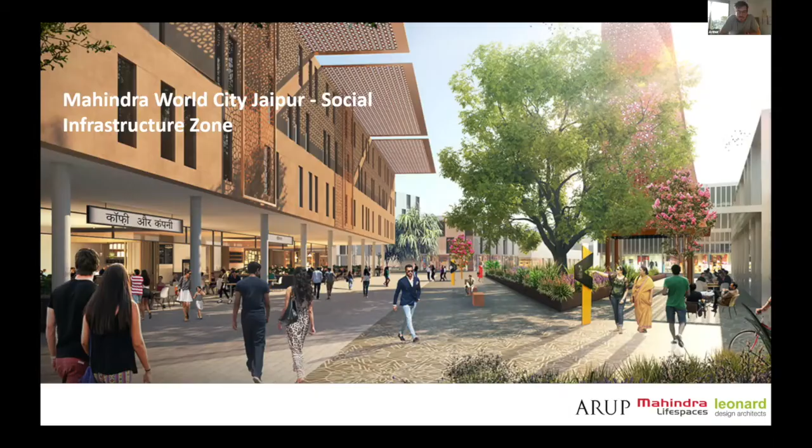Thanks, Christine. We're going to talk today about Mahindra World City Jaipur and our master plan for the social infrastructure zone in that project. The Mahindra World City project is a series of jobs-led cities across India, which look from Mahindra's perspective to develop a new kind of model for dealing with the challenges of urbanization across India, and look to raise the level of the working community and how they live in relation to where they work.

Our project brief site is just to the southwest of Jaipur, and our question really from the client was how to bring a residential environment in at 180 hectares to complement a very large employment-led site already established and being built out over time.

The Mahindra World City project is the first project in Asia to receive the Stage 2 certification from C40, the Climate Leadership Group, and those principles really helped drive the project throughout. One thing we were all too soon to learn from our site visits was the extreme weather conditions that have characterized Jaipur - very hot and wet in monsoon, and very dry and very windy in the rest of the year. That's kind of driven our project throughout.

So we'll cover off some of our responses to those particular conditions. But really, the overall intention was to create a sustainable development, a mix of housing, higher education, leisure, entertainment facilities that would complement the large employment function of the World City, but really seek to raise the bar and align itself with some of those C40 goals.

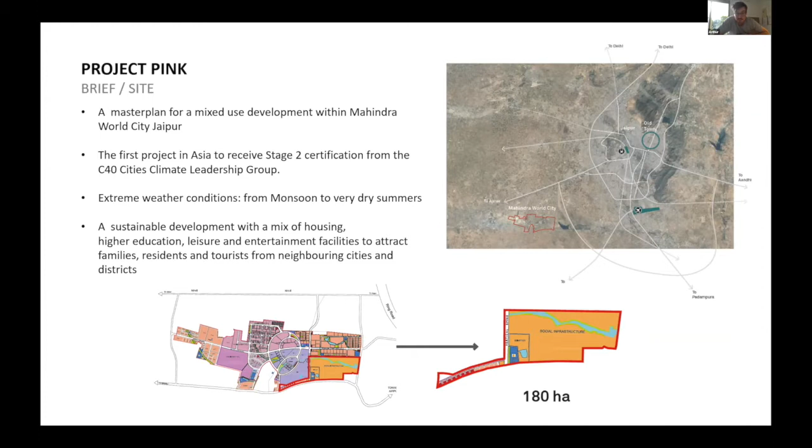Next slide, please. So we're going to talk about 3 key ideas today. The first is how we sought to develop a sense of community, both with the existing working community of the place already, and then imagining a future one. Thinking about landscape and open spaces as the real hero in the project and how it holds that place together over time. And then lastly, how our design and the urban planning and the coding of the work was really driven by a climate response and a climate sensitive response.

So that sense of community, really important to the project, was that it wasn't just felt of as one place, but it was a collection of places. We thought of that as a set of 10 interconnected communities using various different devices to hold them together.

Really important to us in developing this was to start with people. We were given an important way in to start to talk with some of the existing workforce. There's about 20,000 jobs on that site already, and a lot of people there that we could begin to engage with, and those stories, their experiences, really helped to drive some of the expectations of what this new place should be like.

And then equally, we used techniques to imagine how the future of this city might be informed by some new people, some different people that might come as a virtue of the offer of that place.

Two real important devices for us, a key feature of how we evolved the plan away from just being a residential place into a place of much more mixed and diverse opportunities. One of those opportunities was some relationships with existing universities that were looking to expand.

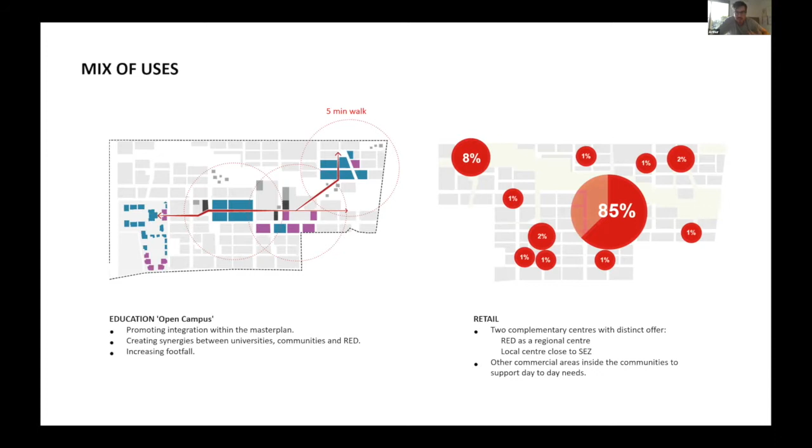And then holding that together is a real principle that you should be able to get from inside your community to the things that you need in a short space of time. So we really pushed hard at the 5-minute walk, a diversity of homes, diversity of open spaces, and connectivity of uses around that kind of really small, walkable and shaded space.

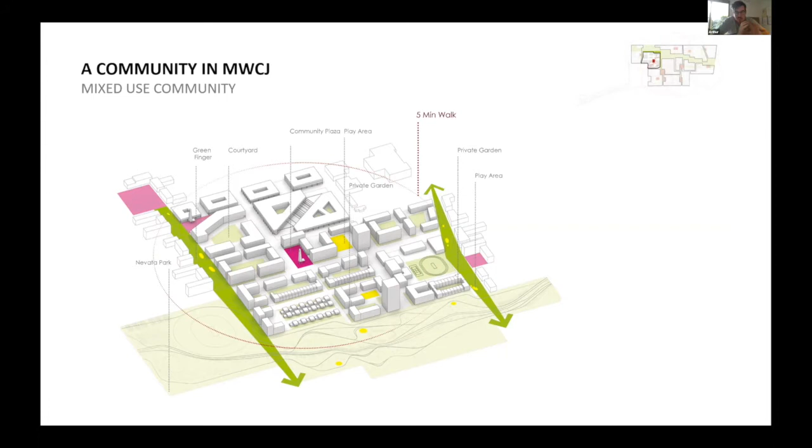So I'm going to hand to Jaime, who's going to talk about some of the landscape devices that held that together. Thank you, Arthur. Thank you.

I would like to start talking about how important the open space and public realm is as an intrinsic part of daily life, culture, and urban tradition in Jaipur. This is evident in the historic center, which is defined by the interface between water, topography, and vistas, and the mosaic of parks, gardens, avenues, and courtyards.

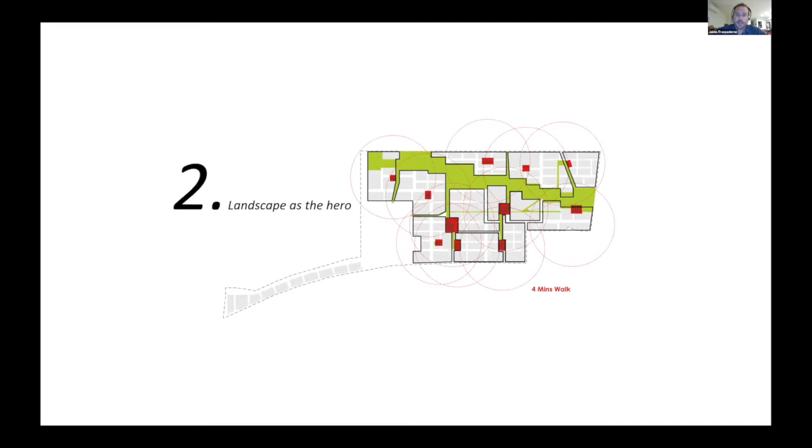In response to this, we developed the concept of communities in landscape, supported by the following core principles. The first is that each resident or visitor will be less than 4 minutes walking distance from a high quality landscape or open space. Each community will have a plaza, integrated local and convenient stores, and amenities to support active community life. Finally, active routes will promote walkability and cycling among the communities to ensure that although they have distinct personalities, they are coherent as a whole.

In order to achieve this vision of communities in landscape, the team developed a landscape strategy based on a network of open spaces. This network is defined by a series of typologies, and each typology plays a different role and function in the network.

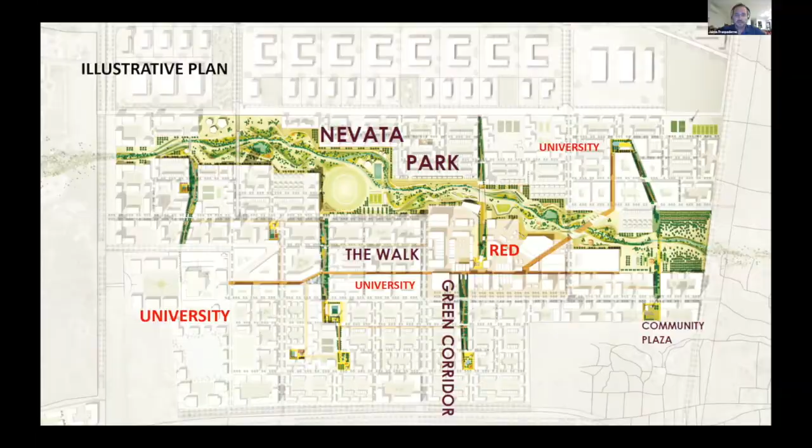The Nevata Park will provide the key destination open space, including a range of formal and informal activities, water attenuation, and connections with the wider development.

The green corridors will provide north-south shaded pedestrian and cycling routes, linking the scheme into the wider area and incorporating small gardens, places to dwell, play, and rest. These corridors also function as a natural storm drainage system, collecting and slowing the water before it reaches the Nevata River.

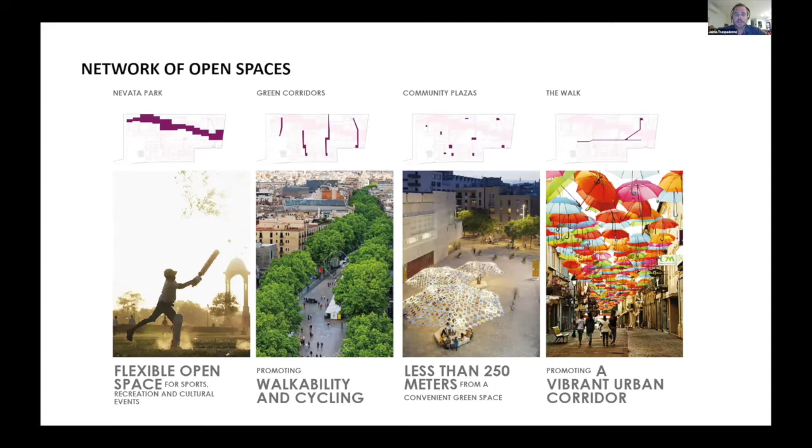Community plazas provide a range of activities, fostering community and a sense of place at the local level. And finally, the walk will provide a more urban and civic corridor that is flexible, seasonal, and shaded, connecting the Red District and the cultural and academic components of the scheme.

The Nevata is the name of the dry river that crossed the site. However, the river is not dry all the time. During the monsoon season, the river experiences several flood events.

We took that as an opportunity to use the park as the main structure for the framework for the master plan, and we use the park as well to collect the water. We use very clever topography to use spaces under the park to collect water that we are going to use to irrigate the open spaces during the dry seasons.

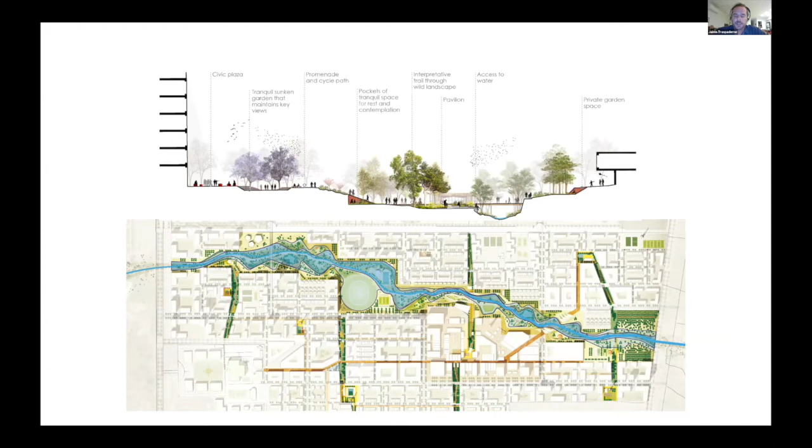And now Sogol is going to talk about our microclimate strategies. Thanks, Jaime. A climate responsive design was one of our core principles for the master plan, especially as Arthur mentioned, considering the extreme weather conditions in Jaipur.

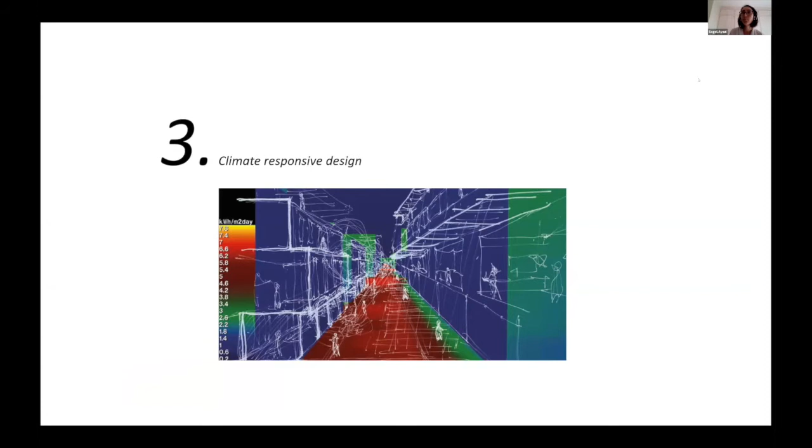The objectives of our strategy were to maximize thermal comfort, provide a comfortable walking and cycling environment, and also reduce energy uses. We developed a series of passive strategies from macro to micro, and the main principle here was to maximize solar shading and complement that with an effective natural ventilation strategy.

Using solar assessment tools, we determined the optimal orientation for plots and pedestrian routes to improve thermal performance of buildings, but also to ensure that the main links between places provide a comfortable environment for pedestrians.

Similarly, the cooling strategy at different scales aims to encourage cool easterly winds while preventing undesirable hot westerly winds.

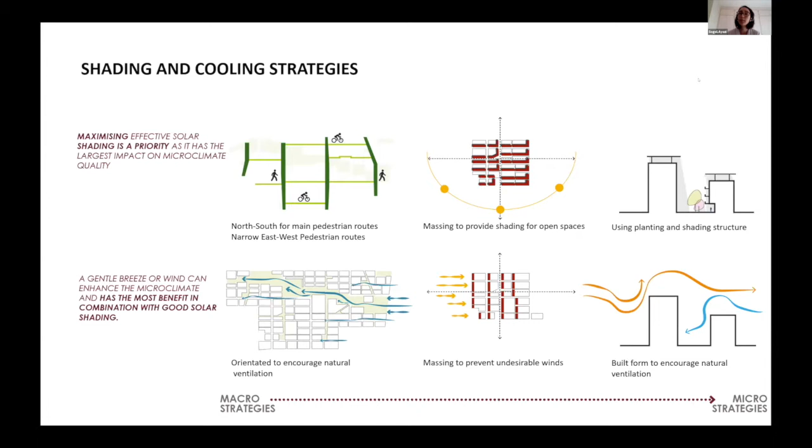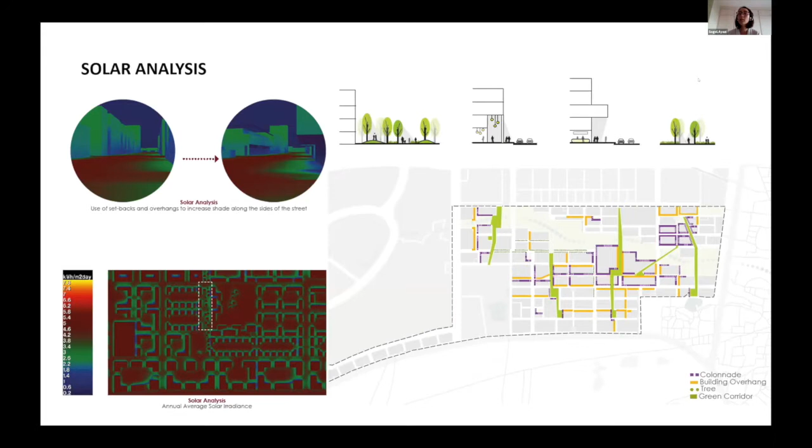The plan here shows an overlay of our passive strategies, and as a result, we propose a network of shaded and walkable routes between different places, and also a comfortable outdoor environment.

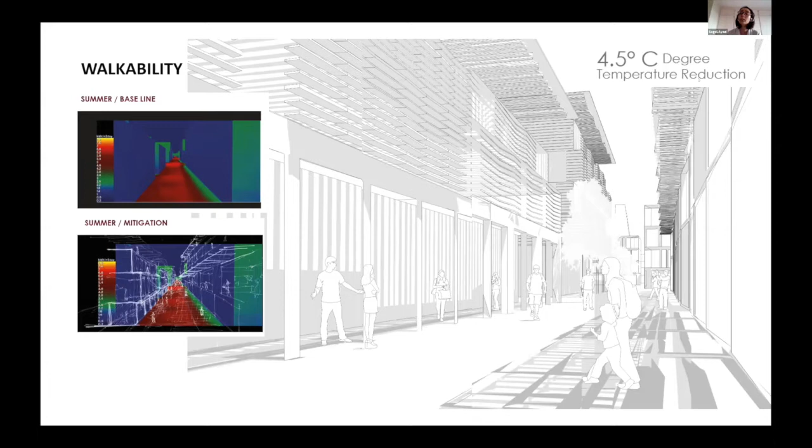And lastly, this is an example of how solar analysis has informed our design. As a result of the overlay of all of these passive strategies and a narrower street profile, the outdoor temperature within the main pedestrian routes decreased.

I'll hand into Arthur to conclude.

I think that's your time. I don't know how quickly you can conclude. Arthur, can you give us one final killer sentence? I can, I just wanted to recap.

So we got 10 new self-sufficient communities, about 9 kilometres of landscape frontage for those, 4 kilometres of shaded and walkable streets, and about 10,000 new homes altogether, 3 universities, about 8,000 additional jobs in that mixed-use place. And what we think, with our client, is now a scalable model for sustainable development in India, underpinned by C40, and now we're starting to see that play out in other cities across the country.

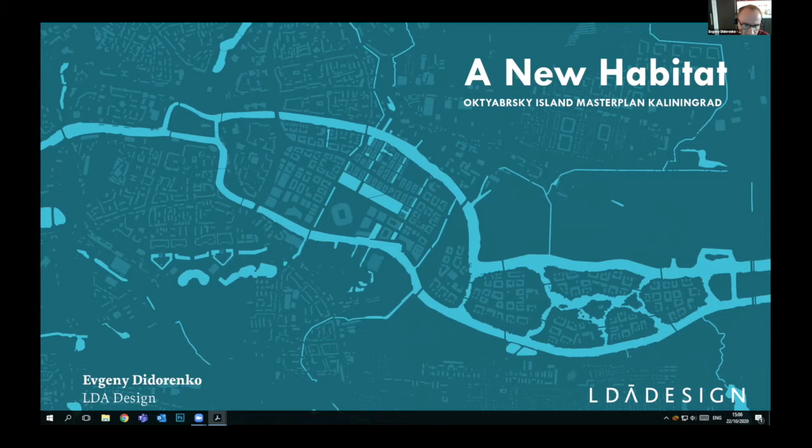So, judging by my name and my accent, you probably already realized that I am Russian. Surprise. And I specifically stretched this map to include my hometown, so it's far away in Siberia. So I'm originally a Siberian guy.

Back to the location of the site, Kaliningrad - you probably never heard of it, but it is an exclave of Russia located in Europe. It used to be part of Germany till the end of World War II, and now you can see that the site has clear potential to become the rising star in the constellation of the Baltic city ports.

So Königsberg is the original German name of Kaliningrad, and it was really badly damaged during World War II. After the war, the Soviet government decided not to rebuild the whole city following the old German building footprints, but instead to build a new socialist exemplar city on top of the old German city. So to this day, you can clearly see those layers: old German churches, Soviet brutalist architecture, and landmarks of the contemporary era, like the stadium built for World Cup 2018.

So a bit of context and a brief: the big changes for the city really started back in 2010, when the city joined the shortlist to be host for World Cup 2018. Shortly after that, construction of the stadium started, which became a catalyst for development for the whole island.

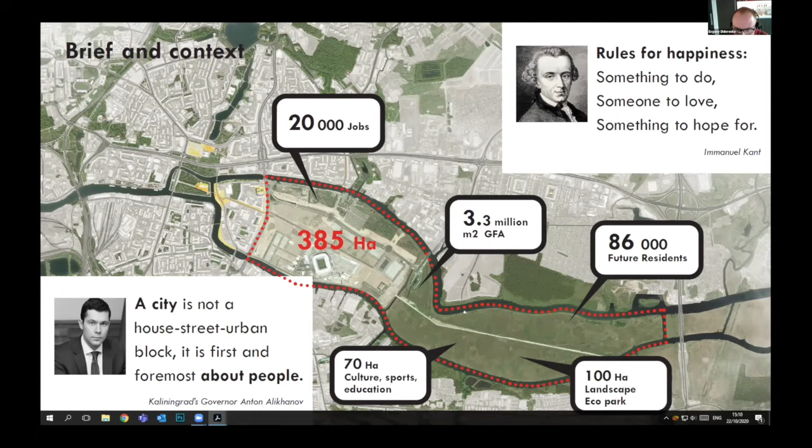So now, if we keep focused on the island and buckle our seatbelts, we'll time travel 80 years and get to the year 2100. So, voila, the master plan is delivered.

Now I will quickly go through the key design moves, or underlying design principles, that helped us shape the master plan which is delivered today.

So the main idea was to link the missing green connection and circle the green loop, which follows the old fortification belts of the city. The only missing link was here on Oktyabrsky Island. So we introduced a few linear parks and a big public open space around the stadium, which is already built on site.

The next big move is bringing water and big public spaces inside the site boundary, to increase the value of development overlooking these spaces, like a big central park in the western part of the site and a big ecology park in the eastern part of the site.

Next design move is a feasible phasing strategy with self-sufficient clusters. You can probably intuitively see those chunks of development — the whole master plan is divided into parcels or islands of development floating in a landscape. It was our intention that the master plan can be delivered in phases, and each phase has its own civic space or core with non-residential facilities like schools, kindergartens, commercial uses, and maybe even offices.

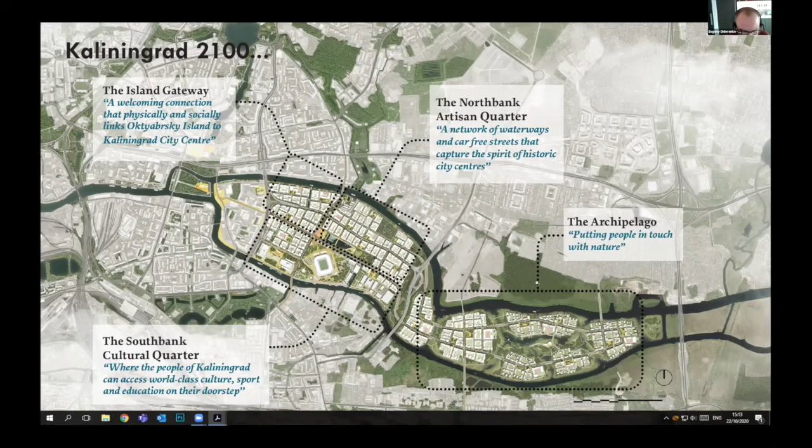The final, 4th character area is the Archipelago. Here we wanted to bring big public open space and water inside the site, increasing the envelope of overlooking public spaces to increase development value and put people properly in touch with nature. So now we'll quickly go through all four character areas.

The first is the Island Gateway, where we really needed to deal with existing infrastructure and make sure this scarred site was stitched back together. This heavy infrastructure, flyovers and things like that, were basically failures of the previous development strategy of the city. Instead of hiding them, we wanted to embrace them, bring life underneath, and make sure they're properly overlooked using public art and light installations—things like disco balls—or commercial uses and play spaces, to keep them safe and active.

Another way to get to the site is by water. Imagine arriving on site via water taxi—this relationship with water, and this edge condition between architecture and water, was crucial for the whole master plan.

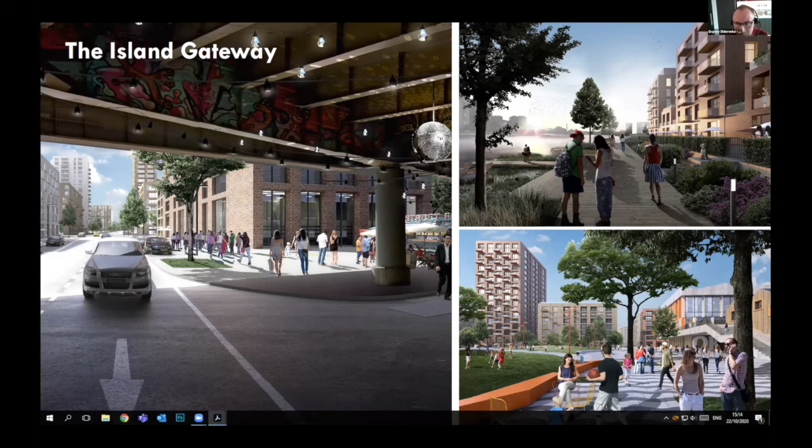The next character area is the North Bank Artisan Quarter. As I said before, we were inspired by old German Königsberg and its medieval structure. We wanted to achieve this vernacular feeling of authenticity, using brick but in a modern, contemporary interpretation.

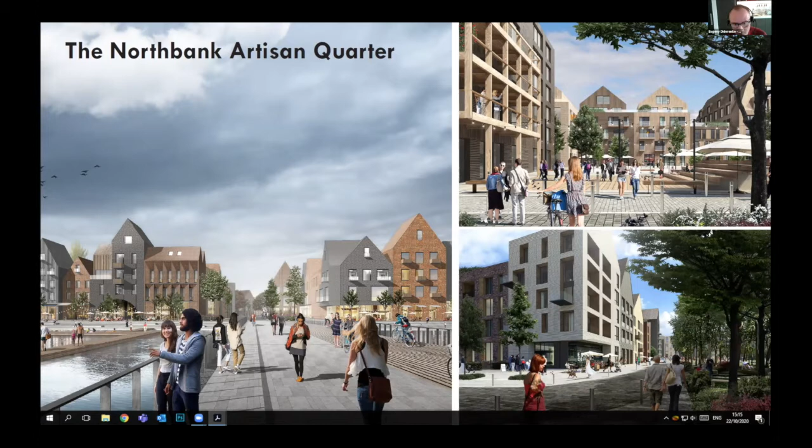The next one is the South Bank Cultural Quarter. Here we wanted it to become a constellation of world-class attractions, with the park campus itself becoming a health and well-being legacy for the whole city. The privacy boundaries of the stadium should be defined by landscape, not perimeter fences, as is usually done in Russia.

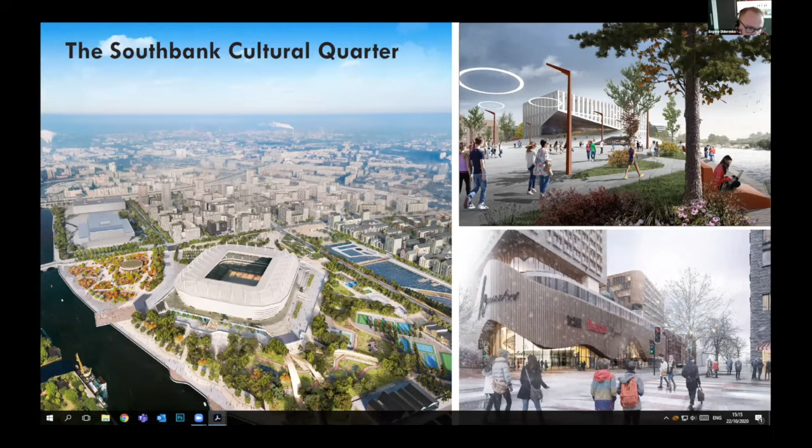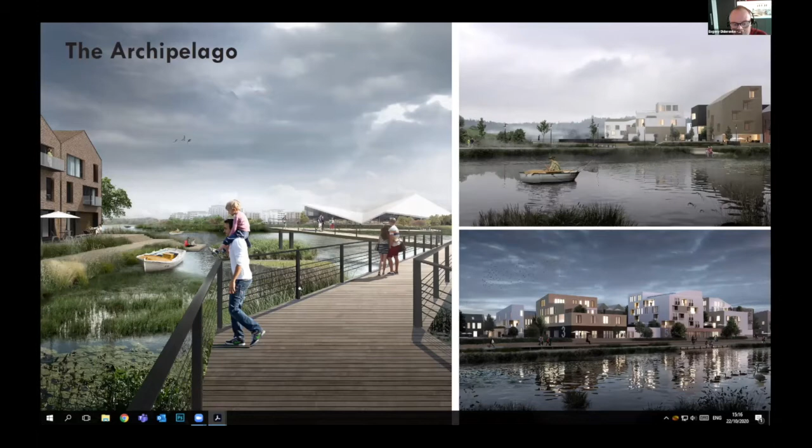So the last one is Archipelago. Here we wanted to bring a big nature ecology park into the middle of the site, with its focal point looking like a massive melting iceberg—the youth and ecological educational center. This park itself will become a wetland ecological habitat for local species to flourish, and at the same time it will play the role of a floodplain, mitigating potential flood impacts.

If you ask me what is innovative about this project, why this master plan, what is futuristic about it—to sum up, I will say that the people-focused approach to placemaking is our innovation in Russia. It means that people and talent are the most valuable resource, not mining, not oil, and not gas. Most importantly, it resonates with the vision of today's governor. So if you multiply UK experience and approach with the scale of Russian development, you end up with an exemplar model for Russian cities and other developments. Thank you for your time.

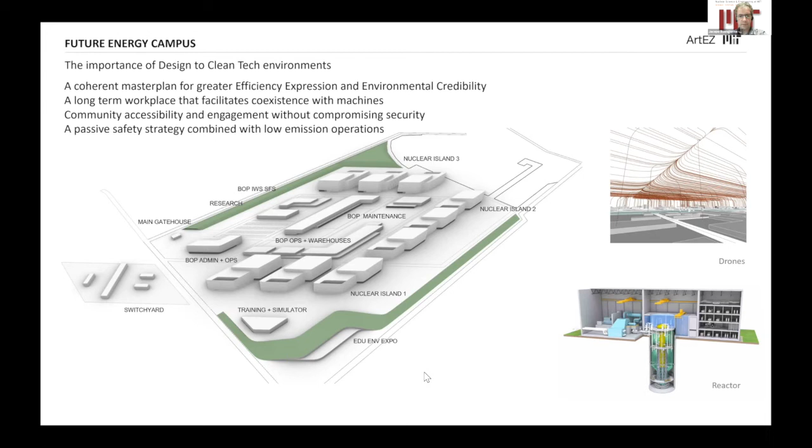Thank you. One of the aspects that really made us think about what the future would look like 10, 20, 30 years out for this working community was to move away from the idea that power is like oil and gas—dirty, messy. We think everything here is actually more aligned with the tech industry, so we'd call it clean tech, because there are very few emissions, most of it is digitalized, and going forward we'll see greater automation.

Our master plan envisaged three stages, each with a nuclear island comprising three reactors, dictated by functional requirements. In stage one, we would have security, training, education, exposition, ops, maintenance, and the first nuclear island set within a blue-green landscape, operating as a 24/7 activity.

Then in phase two, we would increase what we call balance of plant—maintenance, research and development, with external university engagement, warehousing and co-located innovation, and a second nuclear island. Then thirdly, we would add an additional nuclear island and a much wider extrapolation of the blue-green landscape.

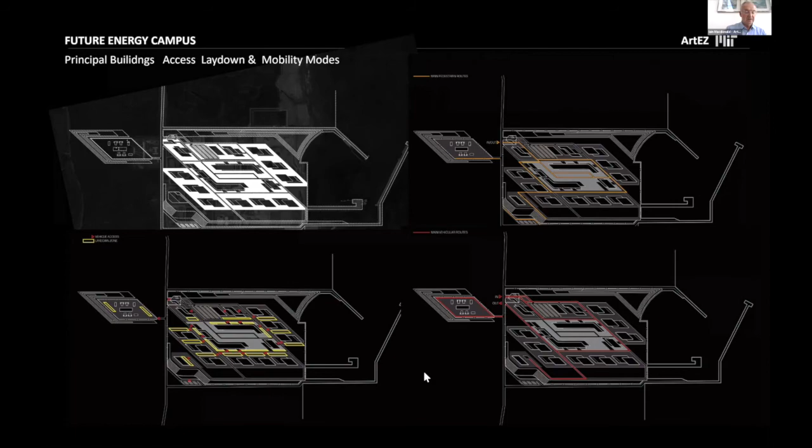What's also interesting is that we would not need power to start work on site, because we would bring a micro reactor. The other aspect we had to think about, top left here, is avoiding visual monotony. Quite often people see these sorts of developments and think they are completely inhuman, but we think there's an opportunity through DFMA, and through the increase in materials available to us, to take this into a different language.

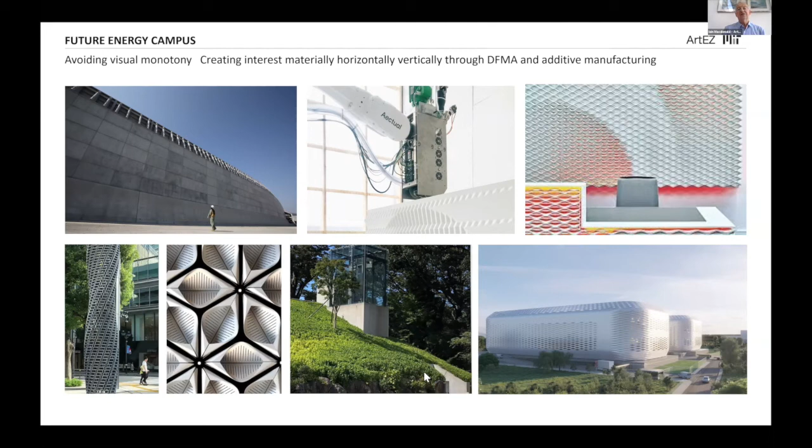We were very interested not just in new materials and what we were doing with data, bottom right, but also in the historical presence of places like the Hakone Sculpture Park, where they were able to put very simple objects and buildings into a lush landscape.

In the future energy campus, we felt that by placing the balance of plant—all the non-nuclear reactor buildings—in the center, at the heart of the campus, it would be a visual expression of an architecture that's empathic and understandable to the observer. That was quite a departure from many traditional sites, which are very linear with great distances between buildings, whereas here there would be no more than a five-minute walk.

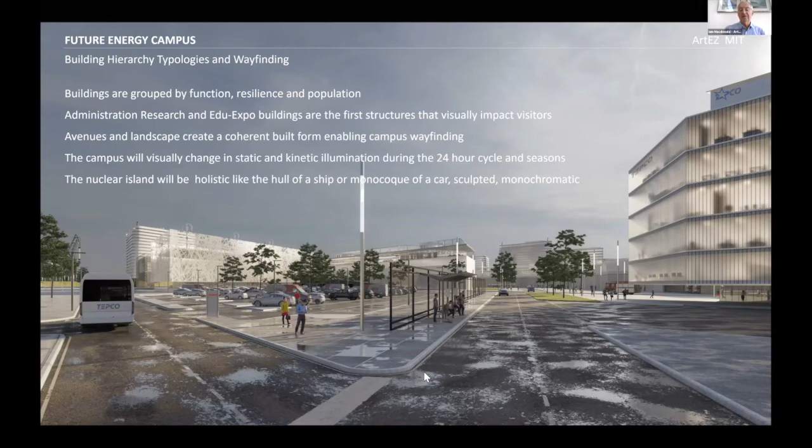But if it's a working environment and a smart energy campus, we felt there was an opportunity to do something else. Unlike most process-based design, we integrated methodologies from the arts into our approach for planning the location of structures and human-machine campus movement, to generate a kind of choreography beyond optimized routing.

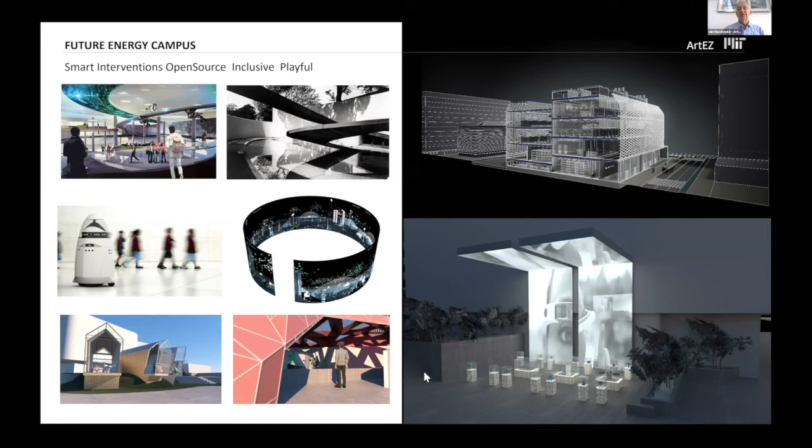One of the key aspects is that we've placed a high importance on hygiene and well-being, cross-generational. For a high-performing work culture, this is extremely important, and for the wider community. We can see green corridors through the development.

We want to see art used in what would, for some people, be a strange environment. We like the idea of third-party engagement. Bottom left is an idea where you'd have a pop-up shop within the admin building where you take your own garments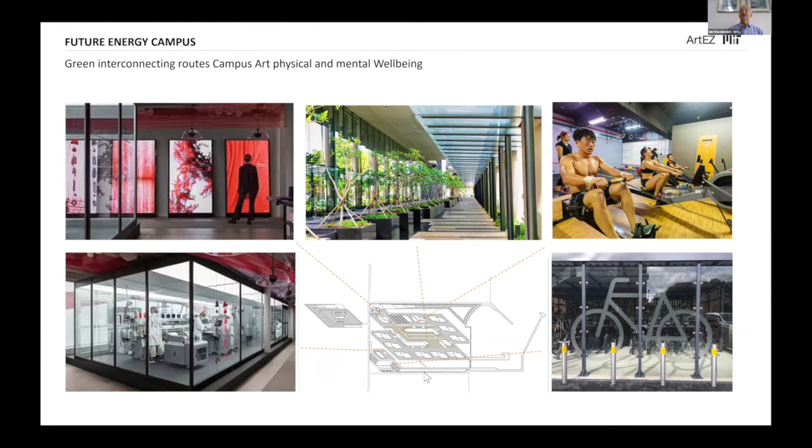and you're fed through without water or chemicals and turned into other clothes. These are all part of the technology interchange expansion Jacopo was touching on. But most importantly, post-COVID, is how would this operate? How would people spending their career here feel year on year?

I think the other aspect we were trying to approach in answering that question was that not everything has to be super elaborated. The buildings need to be robust for health and safety reasons and technical reasons, but also for the aspect of being able to stand over time - the fabric selection of the significant structures has to match that lifetime.

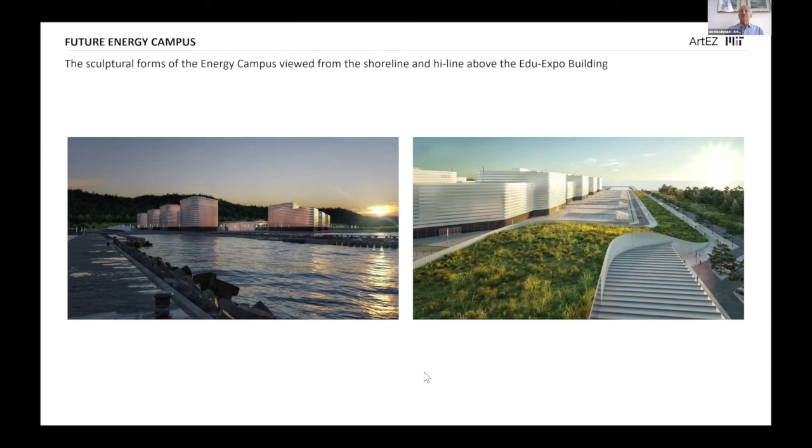So therefore, in the coherence of architecture and context, we felt that the forms should be quite sculptural and they should sit alongside nature.

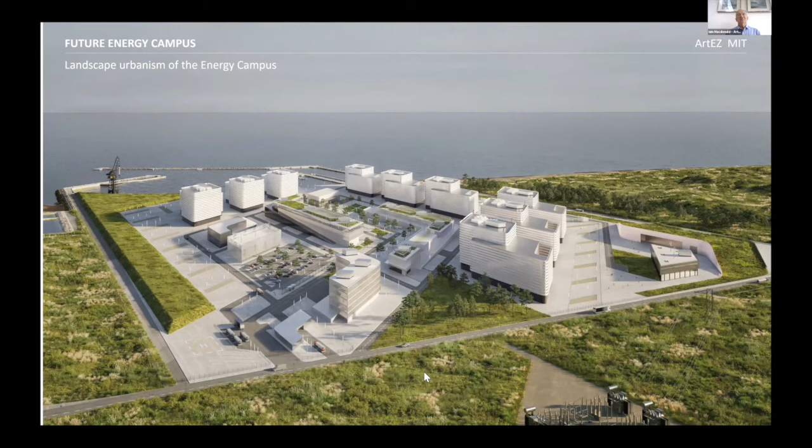Finally, although not quite as literal, we looked at the way Japanese script is written with a brush, a sort of stream of consciousness. In laying out this landscape urbanism, we sought some similarity, in that what you see is like a stroke through the middle, which is the balance of plant, and around this is almost the edge of the paper, which is the white reactor buildings.

There are many questions we've yet to resolve, and other questions we've yet to even think about. And we bring it all back to this question: in the near future, with the oncoming reality of human-machine co-working, what will space and place be like if it is influenced by non-cultural entities?